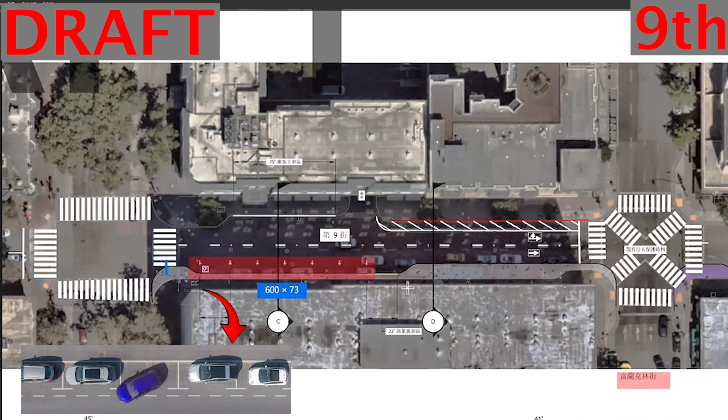Looking at 9th Street between Broadway and Franklin, we are proposing changing one of the travel lanes to parallel parking, expanding the sidewalk for the heavy pedestrian activity, adding in a loading zone, upgrading the pedestrian scramble at Franklin intersection, which includes a painted curb extension similar to what we see at Madison and Oak around Lake Merritt Park.

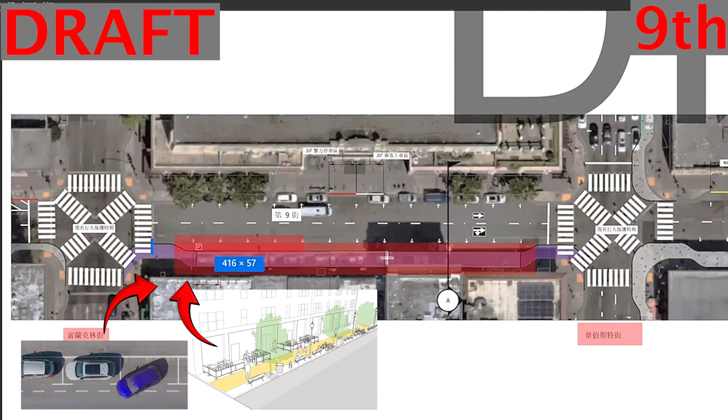Continuing down 9th Street between Franklin and Webster Street, we are continuing to repurpose a travel lane for an expanded pedestrian space, which would be a painted zone, repurposing the parallel parking, but we would still maintain the parallel parking right next to it as well. We would have only two travel lanes here.

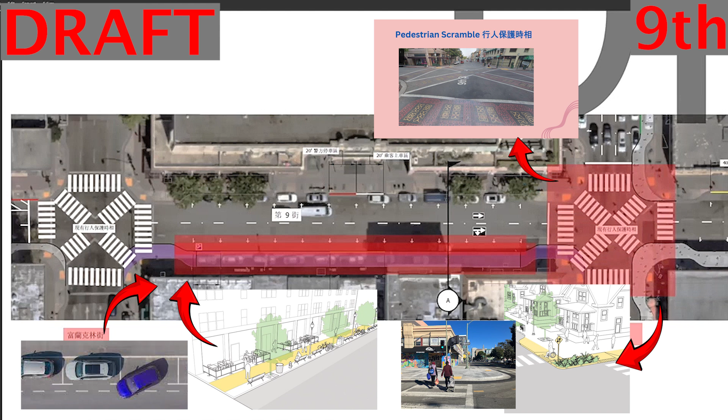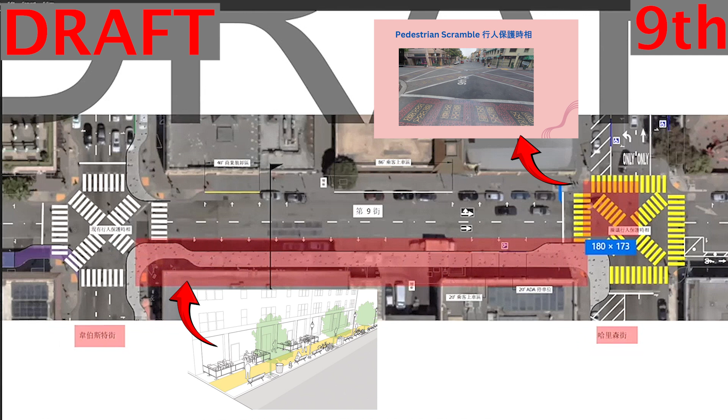We would again upgrade the existing intersection at Webster Street and build full concrete bulb outs at the other intersection sides. Continuing down 9th Street between Webster and Harrison, we will be building out a full concrete extension on the sidewalk extension on the south side of the street, adding in a new pedestrian scramble at Harrison Street, and building out a full concrete curb extension on the west side to facilitate crossing across Harrison Street.

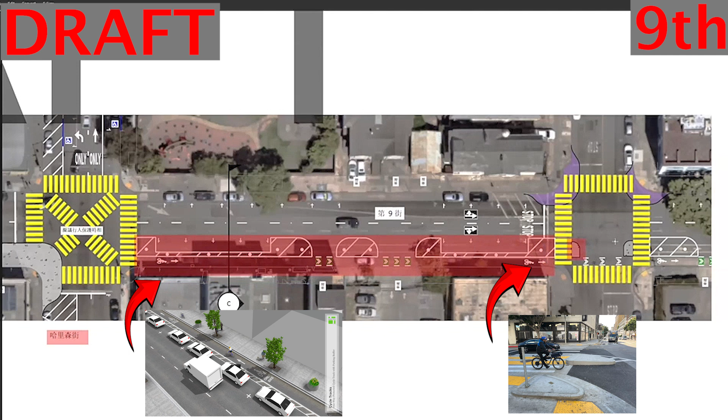Still looking at 9th Street between Harrison and Alice Street, we will be upgrading the existing bike lanes to parking protected bike lanes along the street, and then enhancing the Alice intersection by adding concrete islands to protect bicyclists and pedestrians on the south side, and painted curb extensions on the north side, similar to what we already see at Oak and Madison around Lake Merritt Park.

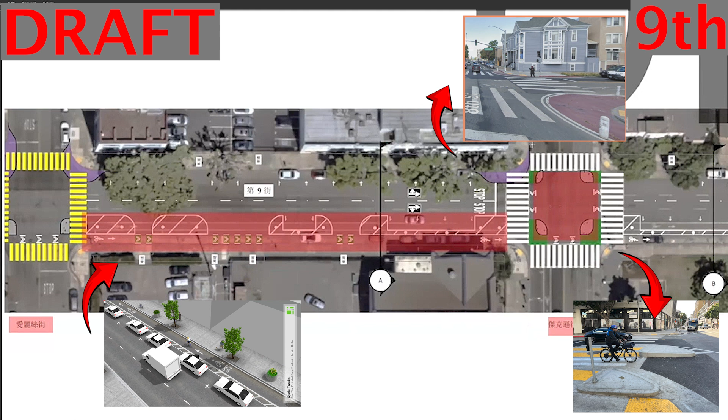Continuing down 9th Street between Alice and Jackson, we will be continuing the parking protected bike lane on the south side of the street, adding in a protected intersection with concrete islands for pedestrians and bicyclists. And on the northwest corner, we'll do another painted bulb out to shorten crossing distance for pedestrians.

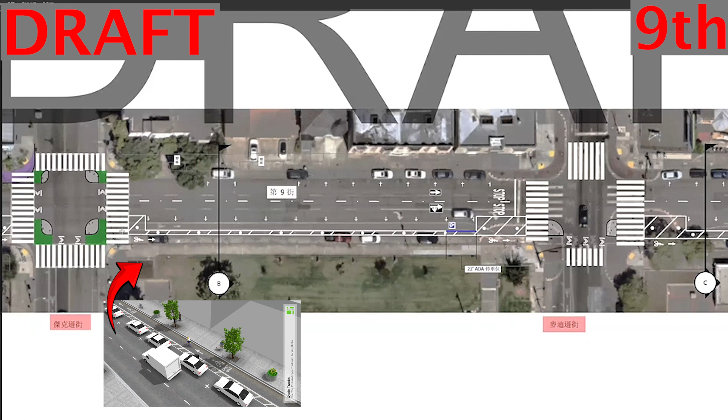On 9th Street between Jackson and Madison, we'll be continuing the upgraded parking protected bicycle lane on the south side, upgrading the existing painted curb extensions to concrete islands on the south side, and upgrading all pedestrian crossings at the Madison intersection to make it easier for pedestrians.

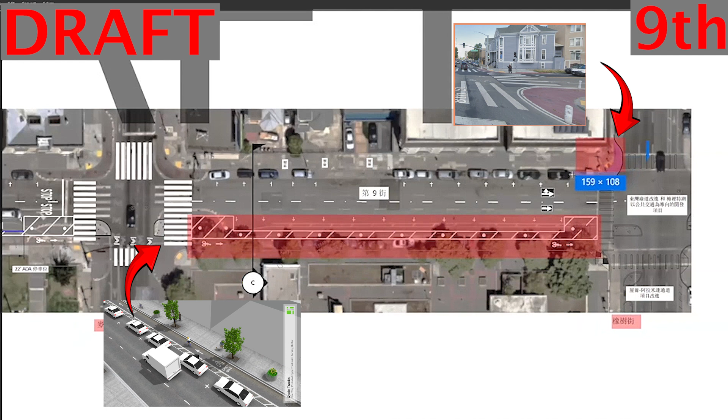And lastly, between Madison and Oak Street, we will be continuing the upgraded parking protected bike lane on the south side of 9th Street. And we'll be adding in a new painted curb bulb out on the northwest corner of Oak Street. This street will tie into already finalized plans for the Lake Merritt transit-oriented development, but will bring in a suite of safety improvements for pedestrians and bicyclists between Oak and Fallon Street.

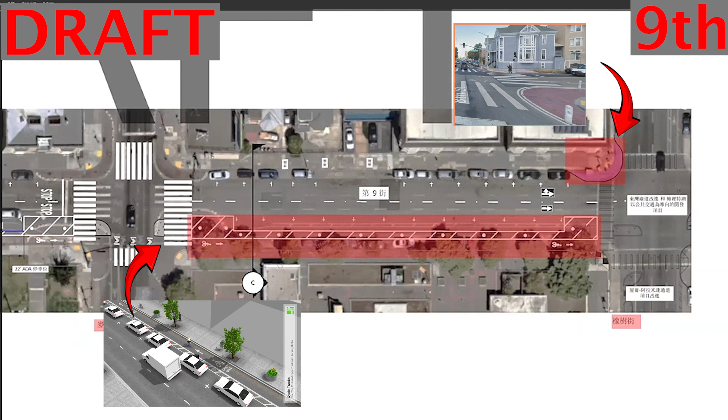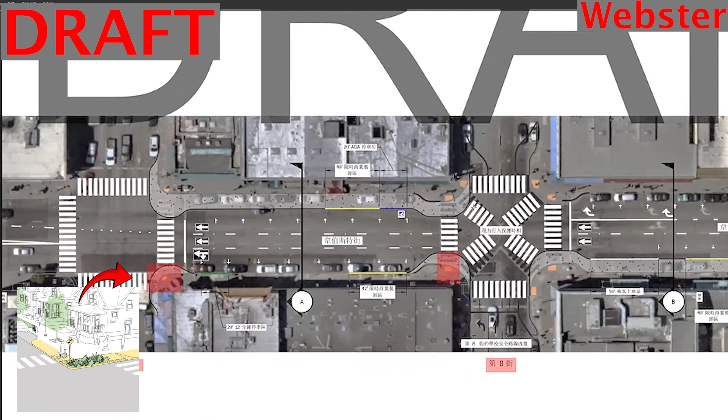Moving on to Webster Street, there's not a lot going on between 6th and 7th, but between 7th and 8th Street, we will be adding in curb extensions to shorten crossing distance on the east side of Webster Street, enhancing the existing pedestrian scramble, and adding in new sidewalk widening on the west side of Webster Street.

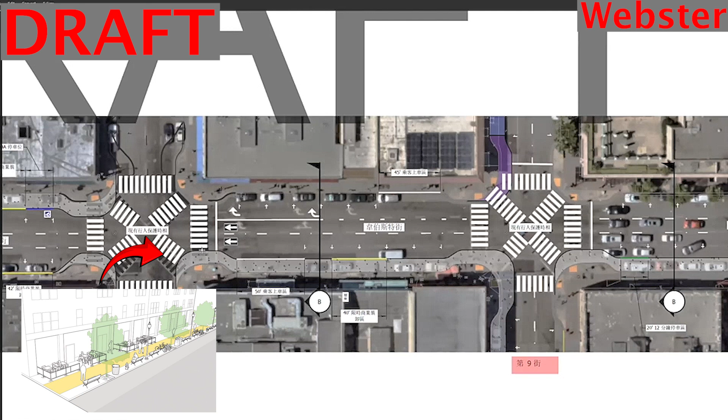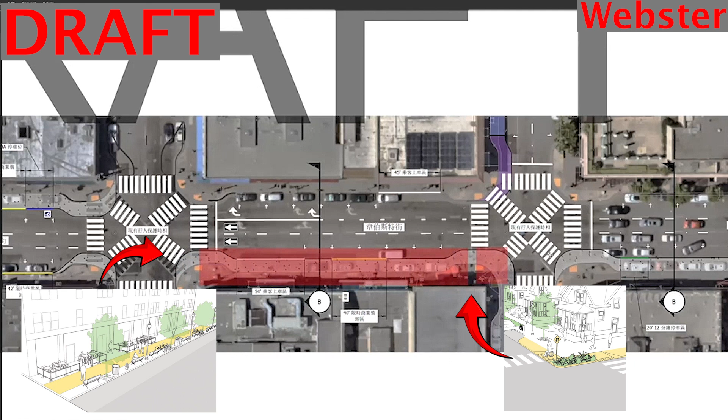Between 8th Street and 9th Street, we are proposing doing sidewalk widening on the east side of Webster Street, adding in concrete sidewalk extensions at the intersections of 9th Street, enhancing the existing pedestrian scramble, and adding in a painted sidewalk extension to shorten crossing distance as well.

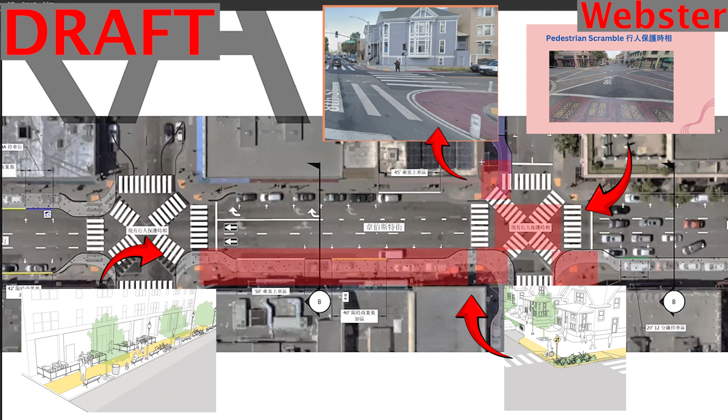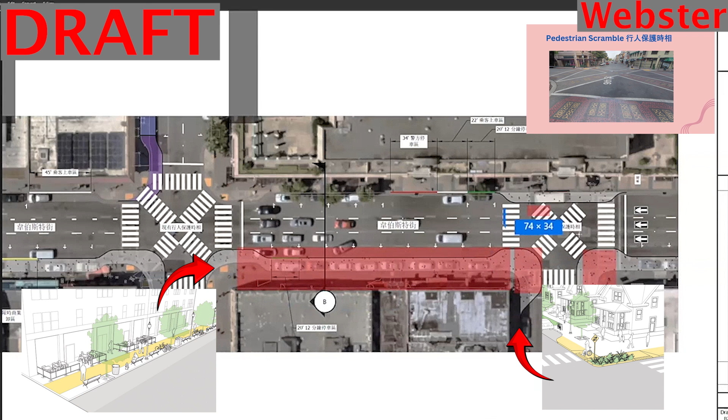Between 9th Street and 10th Street, we are proposing continuing to widen the sidewalk on the east side of the street, adding in large curb bulb outs at the 10th Street intersection on both sides, a new pedestrian scramble at 10th Street, and extending the sidewalk in front of the Pacific Renaissance Center to facilitate shorter, safer crossing distance.

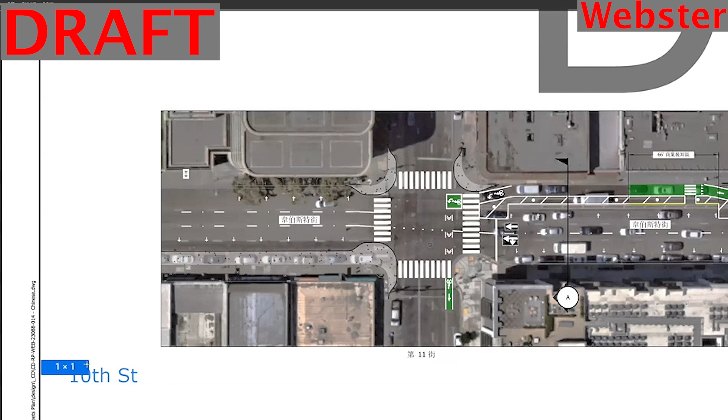While hard to see in these plans, between 10th Street and 11th Street, we are also proposing to widen the sidewalk on the east side of the street and adding full concrete extensions on 3 intersections highlighted here below to facilitate shorter crossing distance for pedestrians.

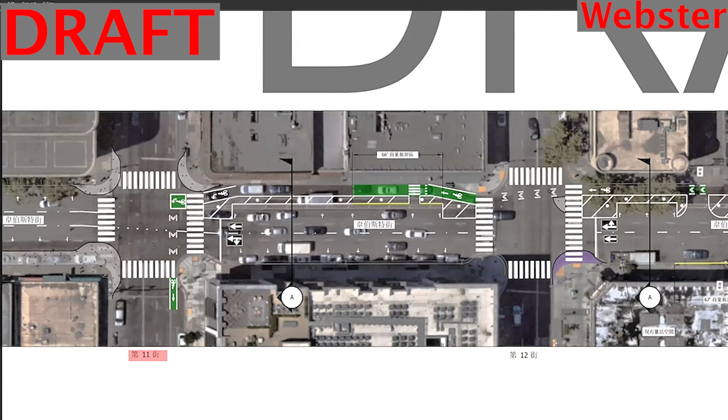Between 11th and 12th Street, we are proposing upgrading the existing buffered bike lanes to parking protected bike lanes on the west side of Webster Street, as well as adding in a concrete island and painted bulb out extension at 12th Street to shorten crossing distance for bicyclists and pedestrians.

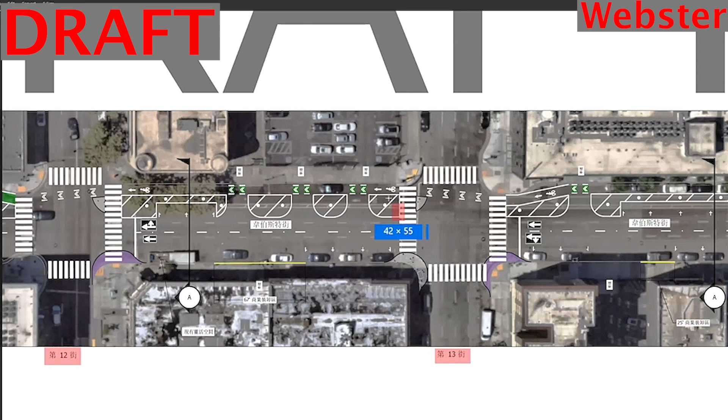Between 12th Street and 13th Street, we are proposing continuing the parking protected bike lanes on the west side of Webster Street, adding in a concrete curb extension, a concrete island, and a painted curb extension to facilitate safer crossings for pedestrians and bicyclists.

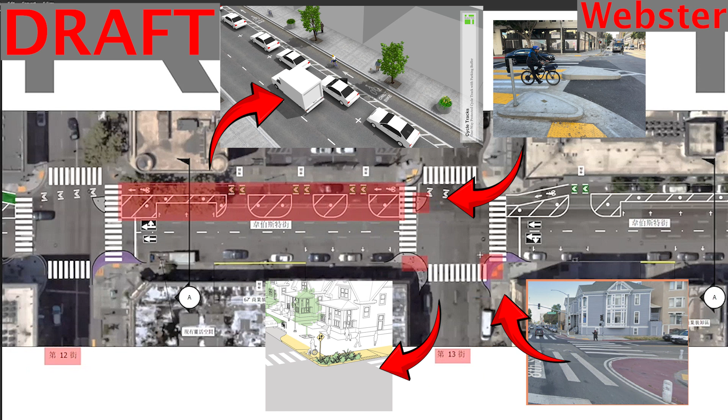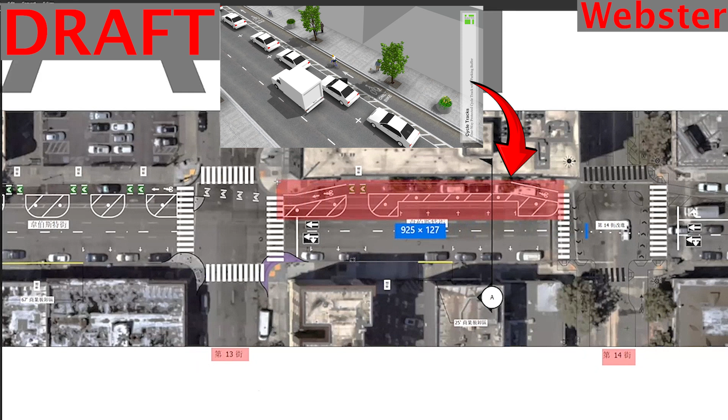And finally, between 13th and 14th Street, we are proposing upgrading the buffered bike lanes to parking protected bike lanes on the west side of the street that will tie into the new protected bike lanes that are currently being built on 14th Street.

Moving on to Harrison Street, between 6th Street and 7th Street, Alameda County is working on a large capital improvement project around the freeway. Please learn more about what the county is doing on their website.

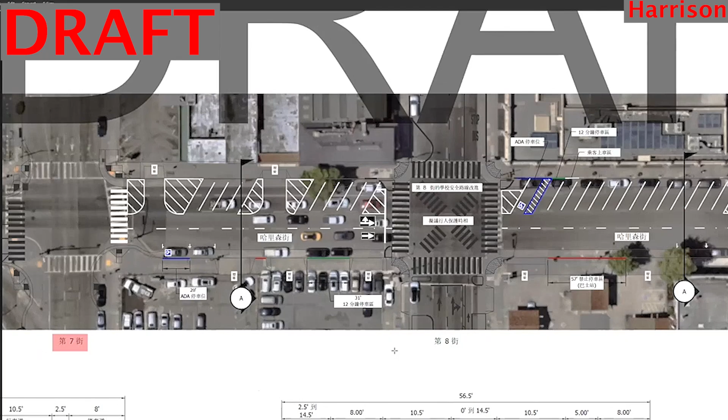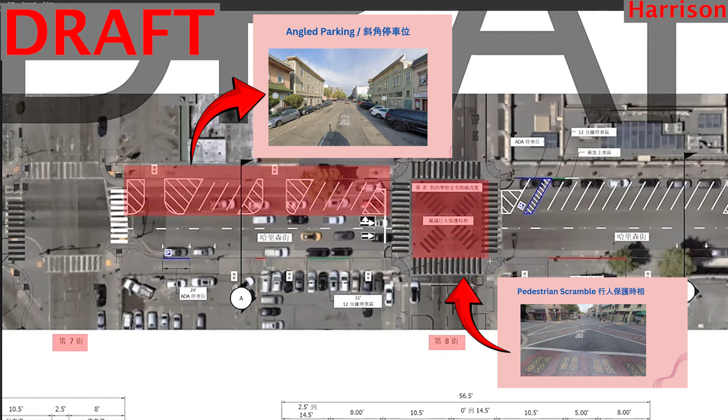Between 7th and 8th Street, we are proposing repurposing a travel lane to add in more diagonal parking on this block on the west side of the street and a new pedestrian scramble at the 8th Street intersection. Between 8th Street and 9th Street, we are proposing to continue adding in angled parking on the west side of the street, a new pedestrian scramble at Harrison, and a concrete curb extension to facilitate shorter crossing distance.

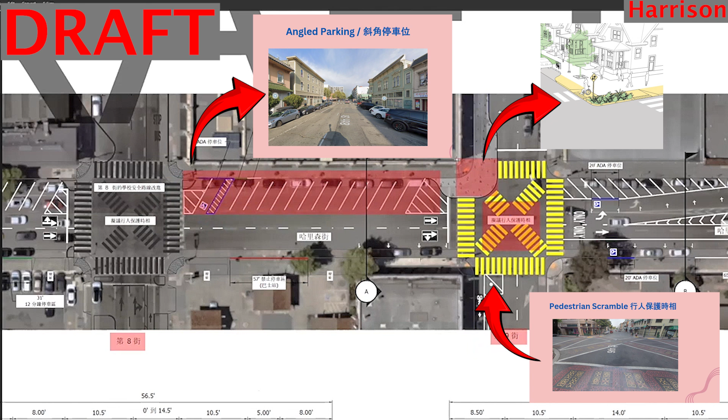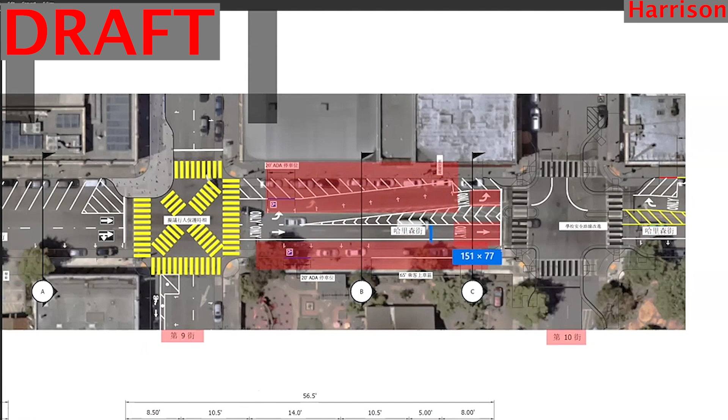Between 9th Street and 10th Street, while we will be maintaining parallel parking on both sides of the street, we will be reducing down to 2 lanes, one left turning lane onto 10th Street and one through lane to continue down Harrison Street, since this is the section where Harrison Street goes from one-way to two-way.

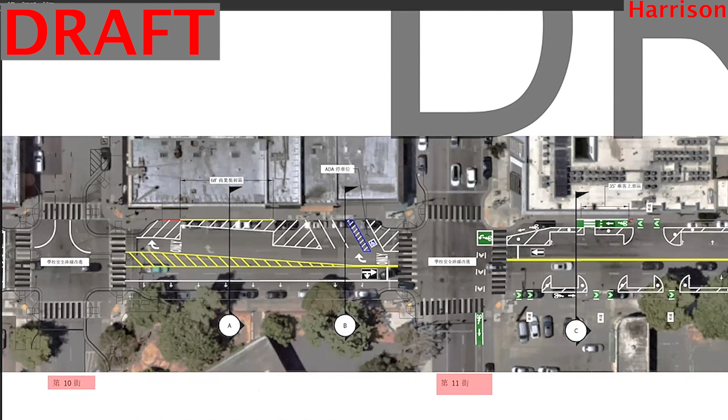Between 10th Street and 11th Street, we will be maintaining parallel parking on the east side of Harrison Street, but adding in some angled parking on the west side, as well as maintaining and expanding a commercial loading zone on Harrison Street.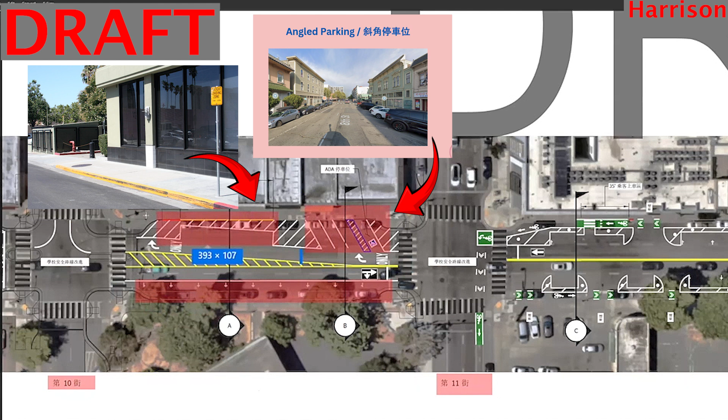Between 11th Street and 12th Street, we are proposing adding in new parking protected bicycle lanes on both sides of the street to connect our existing bicycle network on 11th Street to the new bicycle network on 14th Street. Between 12th Street and 13th Street, we are proposing continuing the parking protected bicycle lane on both sides of the street.

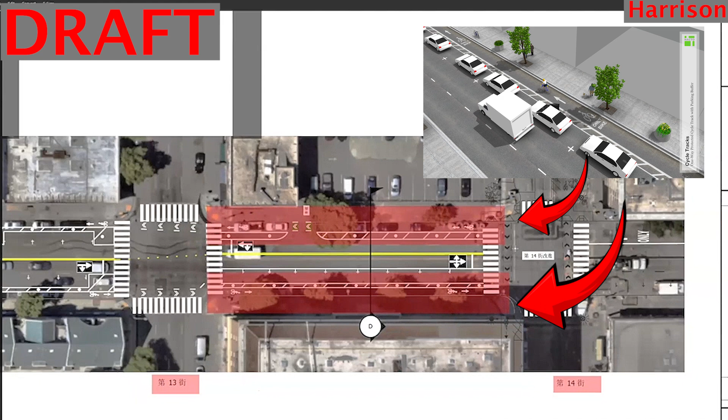And lastly, between 13th and 14th Street, we are proposing continuing the parking protected bicycle lanes on both sides of the street to tie in the bicycle lanes on 11th Street to the new bicycle lanes being constructed on 14th Street. Thank you for watching, and I hope this helped you understand the proposals better.

Please let me know what you think and how we can improve these plans to fit the community's needs.